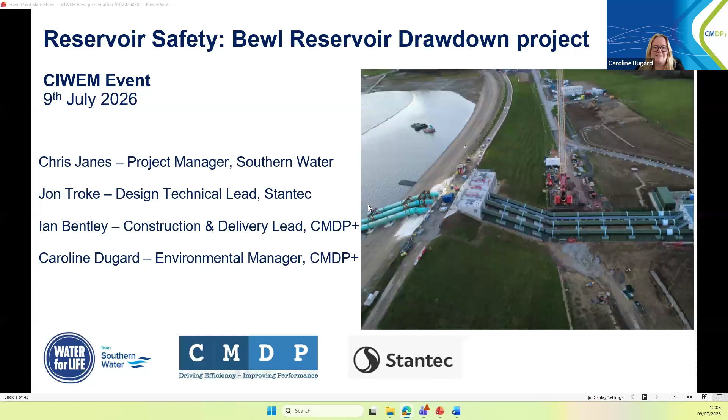Last but not least, Caroline. Hi, everyone. I'm Caroline Dugard. I'm the Framework Environmental Manager at CMDP, and I was involved in Bewl right from the beginning, all the way through construction, and now as it stands, we're just about to hand over. Brilliant. Thank you, Caroline.

So before we get into the exciting project details and technical engineering solutions, a little bit of context here. Bewl Reservoir was completed in 1976. We've just celebrated its 50th anniversary, and it's located on the Kent and East Sussex border near Lamberhurst. What makes this body of water so special is that it's the largest body of water in southeast England. And for those watching and enjoying the World Cup football, fun fact, it's got a surface area the same size as 436 Wembley football pitches. So it's humongous.

It's a key source of drinking water for East Sussex and Kent, supplementing the drinking water network for hundreds of thousands of customers within Southern Water and also Southeast Water customers. For example, the reservoir is the main feed for Burham Water Supply Works. In the summer, it supplements the low River Medway. And Burham supplies over 65,000 customers just in West Medway. So it's absolutely huge.

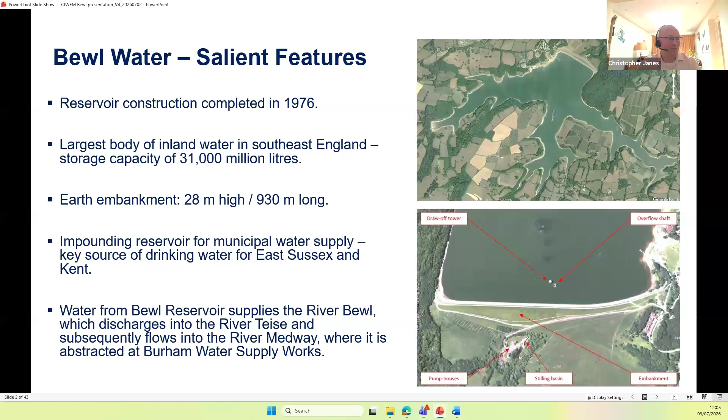So why is this reservoir project needed? Well, as I'm sure you can all appreciate, the greatest resilience risk for any impounding reservoir such as Bewl is structural failure.

Thankfully, a breach was avoided. However, the incident clearly demonstrated the potential severe consequences of a reservoir failure, including risk to life, widespread community disruption, and significant economic damage. Managing this low likelihood but high consequence risk is therefore a fundamental responsibility for reservoir owners and operators such as Southern Water.

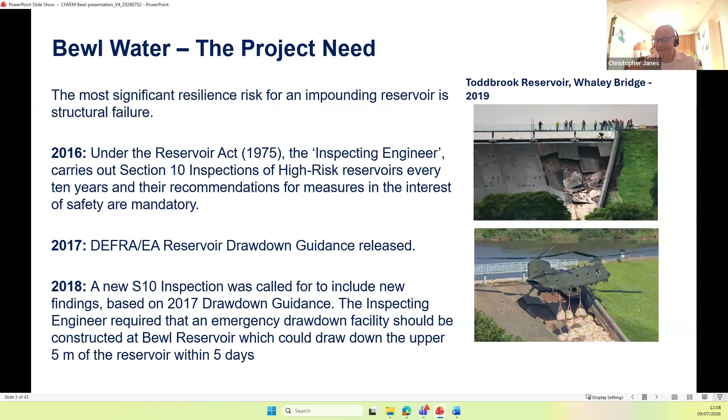This project is supported by piezometers and instrumentation within the earth embankment to monitor the internal dam conditions and detect changes affecting structural stability. So there's a bit of context for you all on what the project is and why it's been delivered.

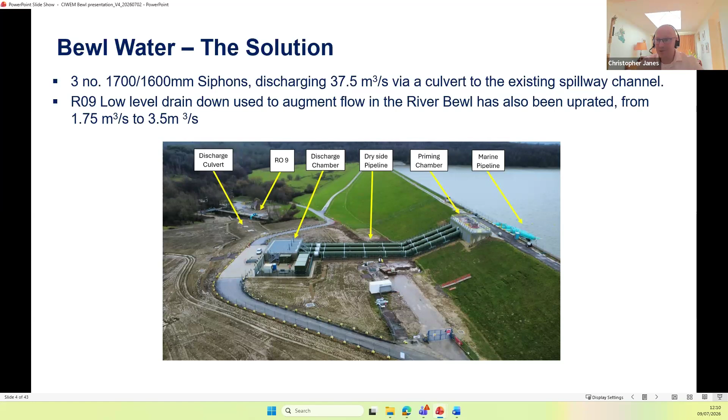Firstly, before we settled on siphons as the preferred solution, there was a staged options selection process. We did start with a long list of options, but very quickly it became apparent that many of those options simply didn't have the capacity to discharge the amount of water that Chris has just been explaining, those large volumes, or other options weren't acceptable in terms of construction constraints in respect to reservoir safety. For example, any options that involved tunneling through or under the dam were very quickly discounted. So our long list of options very quickly got whittled down to just 2.

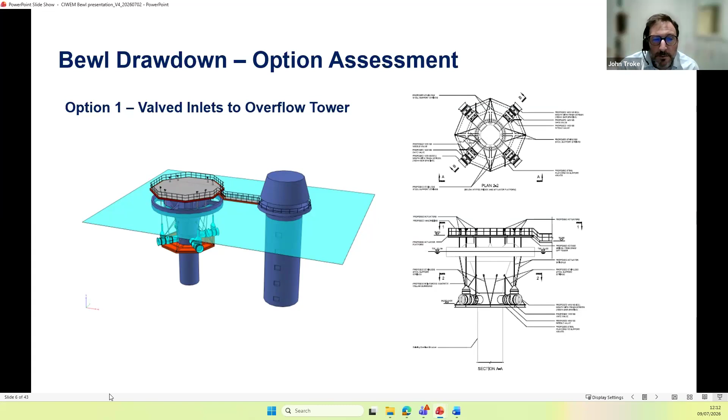So this was developed to a concept stage, but then eventually it was ruled out for reasons that I'll explain in more detail on a subsequent slide. But our other option was, of course, the siphons approach, which is shown on the next slide, Chris.

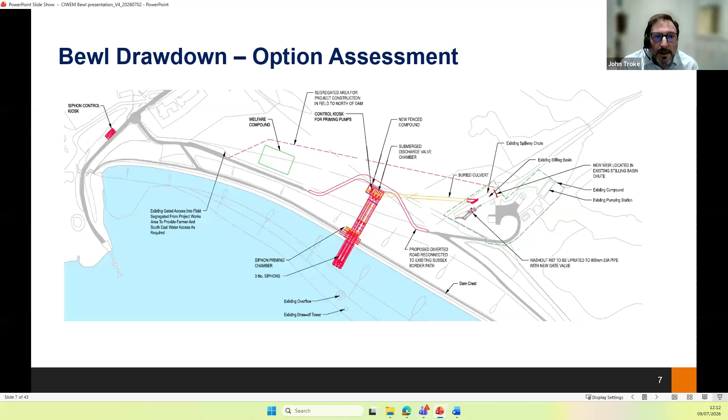So we did some stability assessments, and we found that putting 4 large diameter holes halfway up that shaft was not really acceptable from a structural stability point of view, particularly with the weight of all the valves and pipe work that would be installed along with operating platforms, which would make it more top heavy. So the analysis suggested that from a structural stability aspect it wasn't necessarily a feasible option.

But there was also a second reason to discount it. As mentioned, the openings would need to be about halfway up. We decided it wasn't feasible to demolish holes in a structure like that using underwater technology, so we believed there would be a need to temporarily drain the reservoir down to the level of those openings to do the construction. That would have been quite an undertaking.

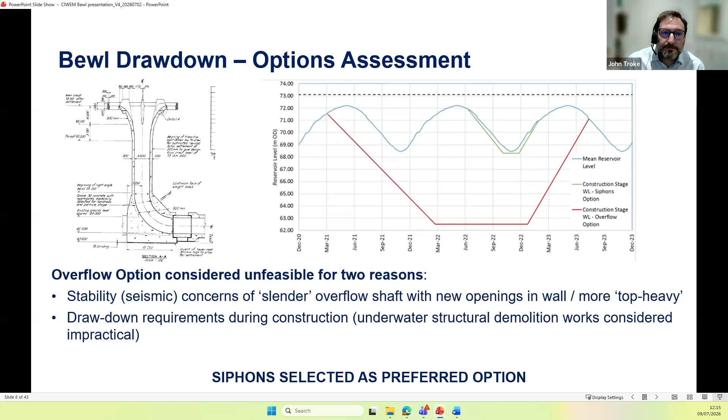For definition, going back to what Chris has already said, we had a requirement to achieve 5 meter drawdown from full supply level within 5 days, with a Q50 or mean or median catchment inflows to the reservoir. It was important that the siphons could be primed and operated over that full operating range.

There was a need for them to be primed down to a level of full supply level minus 5 meters, and it was also required that the siphons should be wet tested routinely in future—notionally, one siphon fully wet tested every 6 months. We consulted guidance from the CIRIA Siphons in Dams publication, and previous case studies, particularly Queen Mary Reservoir from Thames Water, which gave us a couple of key principles we chose to adopt.

We wanted a dual priming system—where you can fill the downstream section of the siphons simply by pumping water into the pipe until you fill the siphon up to crest level, then use vacuum priming to prime the crest section and the upstream leg of the siphon. Going for a vacuum priming approach means you don't need a submerged valve on the inlet to the upstream leg, which has significant advantages for us at Bewl.

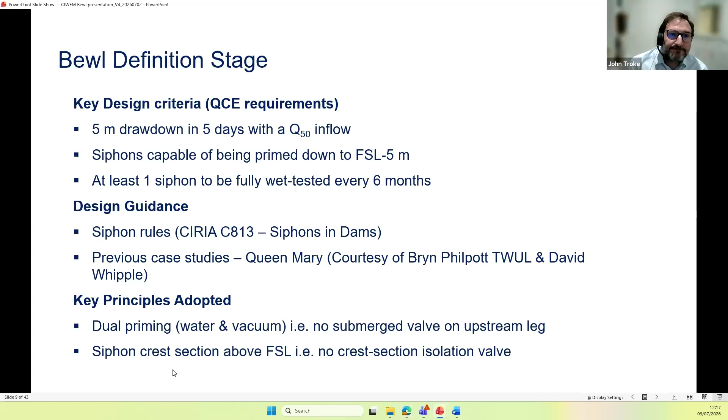So I'll go through the design starting at the upstream end, heading downstream.

The first consideration is the siphon inlet. We needed to set it sufficiently below water to keep it submerged, using standard equations for submergence. The idea is to have it sufficiently submerged to avoid vortexing when operating. If vortexing occurs, the inlet could gulp in air, and in a siphon system those chunks of air could break the siphon effect and stop the flow. So it's very important to avoid air entrainment through the inlet.

So we used our standard equations to pick a level, and then tested it using computational fluid dynamics, CFD, which are the colorful images at the bottom. They confirmed no vortexing and a fairly tranquil approach into the inlets.

But just to give some additional security, the drawing on the right, which is a section, shows the inlet bell mouth surrounded by an inlet cage. The top of that cage is a solid steel plate acting as a hood, which also helps prevent vortexing at the inlet. Okay, next slide.

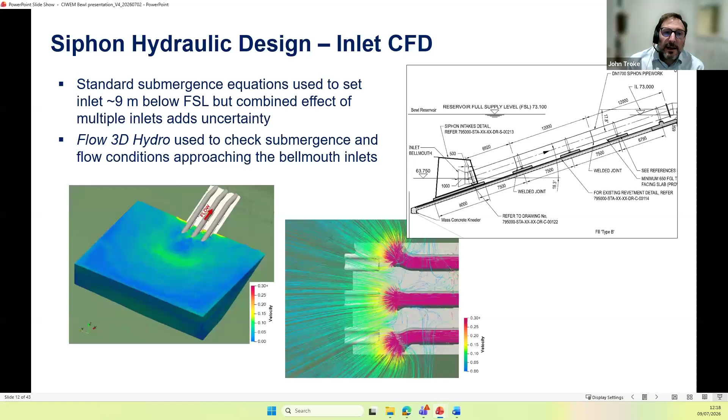The siphon pipeline structural design, we did by producing a stress model, shown by the upper image. Civil engineers used to designing below-ground pipe work will soon find that above-ground pipe work on a siphon scheme like this is a completely different beast, with a lot more to think about in many respects.

So we did this stress model, and we modeled a number of hydraulic scenarios to assess internal pressures in the siphon pipes. We also modeled external scenarios to give us external pressures on the pipe, things like wave slam on the wet side, the reservoir waves hitting against the pipe, but most significantly thermal effects in summer and winter, which were quite onerous.

The drawing at the bottom is a long section through the siphons with the inlet on the left. You'll see the upstream leg of the siphons sat on concrete pads placed onto the existing dam revetment, with steel saddles designed to slide to accommodate thermal movement.

Similarly, on the downstream slope of the dam, there are concrete pads with screw piles going down into the dam embankment, also fitted with sliding saddles to accommodate movement. At the bottom of that downstream slope, there's an expansion joint to take up movement before the horizontal section to the discharge chamber.

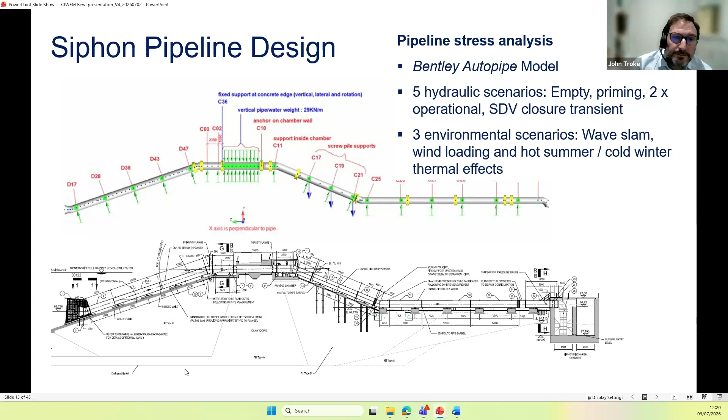Firstly, the priming chamber then. This is in the crest of the dam. We opted to provide a reinforced concrete chamber embedded into the downstream side of the crest of the dam. The idea was that all the machinery, moving parts, controls, everything would be housed in that concrete box, so it was an inherently safe structure. By doing that, there was no need to put up any unsightly security fencing on the crest of the dam, which wouldn't have been a good option.

So by doing that, we were effectively able to turn the roof of that priming chamber into a publicly accessible viewing platform. The bits of hand railing you see around some of the covers are actually demountable, so they wouldn't be there the majority of the time. It's a safe structure for the public to go on top of, without risk.

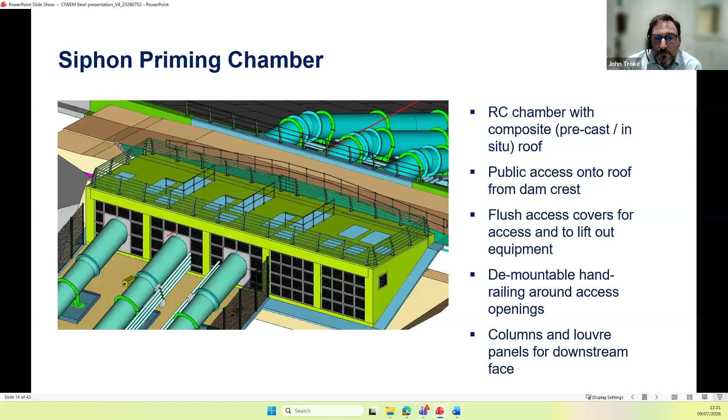That's the priming chamber from the outside. We'll now go to the next slide.

This is the priming chamber with the concrete box removed so you can see inside it. At the right side of that 3D image, you'll see four shapes with a person stood between two of them. That's the duty standby water priming pumps and the duty standby vacuum pumps. Going for the dual priming system has the benefit that while you're vacuum priming one siphon, you can already start water priming the next one, so they overlap. That meant we could prime all 3 siphons in well under 3 hours, so in an emergency situation you'd be confident of getting these siphons up and operating very quickly.

Also shown on the siphons, you'll see various pipe work and valves that are there to aid that priming process and to allow the siphons to be broken if needed, to stop the flows at the end of a test, or if you've achieved what you need. Okay.

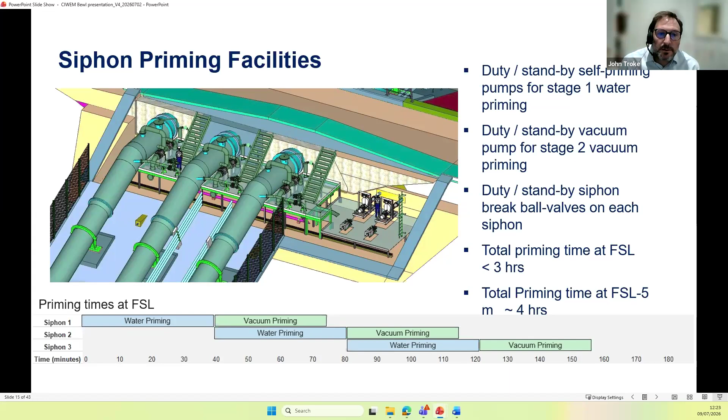At the downstream end of the siphon pipes, we've got the siphon discharge chamber. Here we opted to use Glenfield submerged discharge valves. The requirement to test the siphons meant we had to minimize the volume of water released by each siphon test, so we put hydraulic cylinder actuation on these valves so they could be opened and closed within 70 seconds, which is remarkably quick. If you've ever watched an electric actuated valve open and close, it can be tiresome, but these are much quicker.

The design adopts a standard Glenfield valve civil arrangement. Each valve is housed in its own stilling basin with internal baffles for energy dissipation, and the water weirs out from each stilling basin into a common collection channel, from where it gets conveyed by the culvert. It's worth noting that when we opted for the quick acting valves, we also did a surge analysis to make sure that action didn't create unacceptable pressures in the siphon pipes upstream.

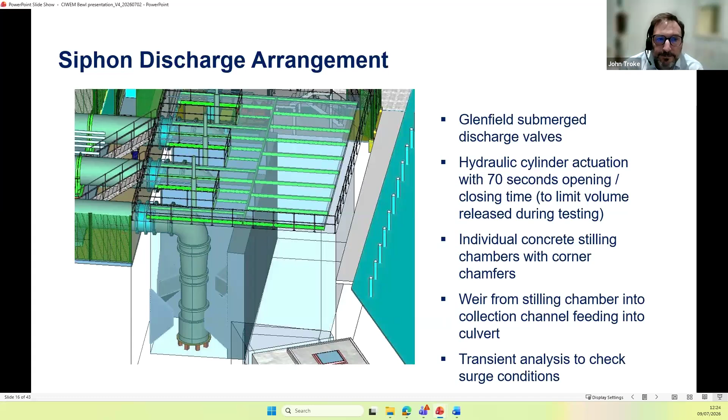From the discharge chamber, the water is conveyed by the culvert. It's a very large culvert, 4 meters wide, 2.5 meters high or deep. Because of the topography of the valley sides that the dam's situated in, it was laid on quite a steep gradient, so it's 140 meters long, sat on a 1 in 10 gradient. That creates the potential for high velocities.

There's some standard guidance and software available from America that we used for initial checks. We used software called HY8, and that told us that for this particular arrangement, we should be looking at internal dissipators spaced every 2.5 meters. Those were in the form of 250 millimeter high weirs, effectively, to send the water cascading down. At the downstream end, we simply flatten the culvert out and create what's called a USBR Type 1 stilling basin, the simplest form of stilling basin. That basically ensured the water exited the culvert and joined the existing spillway chute in tranquil conditions with velocities in an acceptable range.

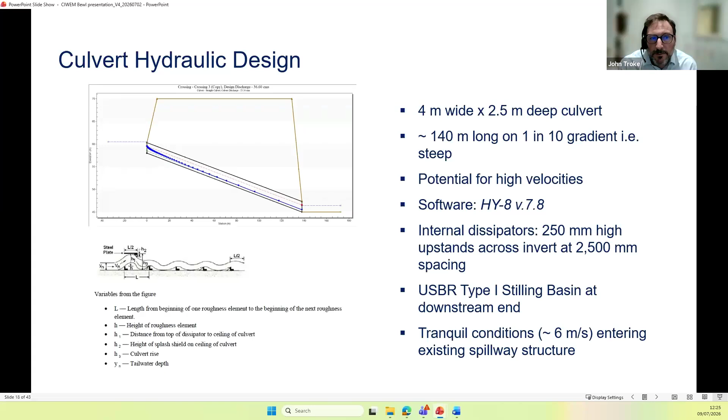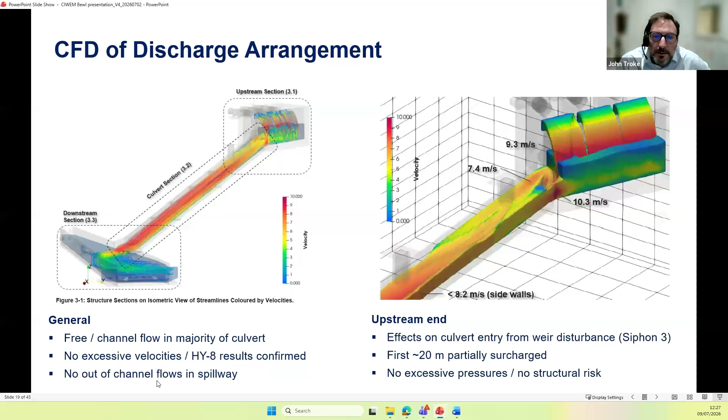So that means the water coming down the culvert from the siphons gets collected behind that weir, and there are a number of openings so that the water can be released to the tiny watercourse downstream very gradually.

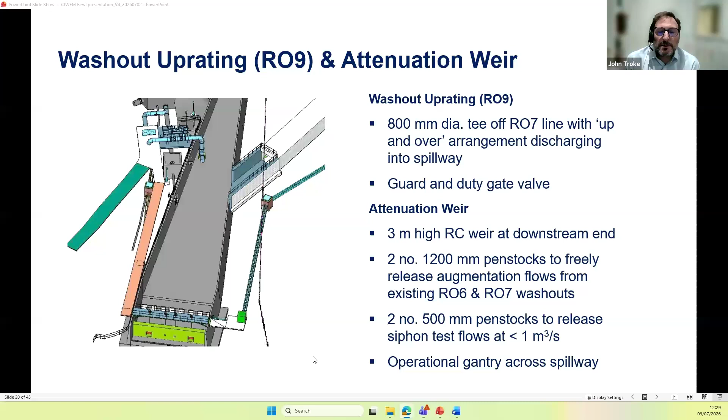There was also an operating platform, the blue structure just above the lime green. In the back of the picture on the left you'll see blue pipe work - this is where we uprated a bottom outlet washout arrangement, so we could improve the drawdown characteristics below the operating range of the siphons, getting the lower portion of the reservoir volume out quicker than in the current situation.

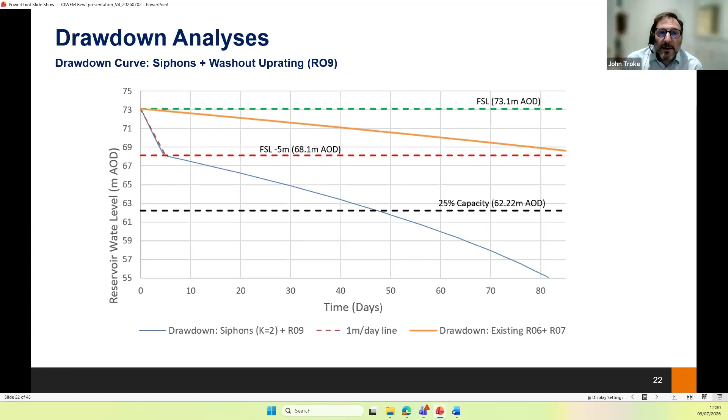And that's my part complete, I think, Chris. Fantastic, thanks for that, John.

So I've got the challenge of trying to talk about the construction of this project within 10 minutes. I'll do my best and do a whistle-stop tour through the construction of Bewl.

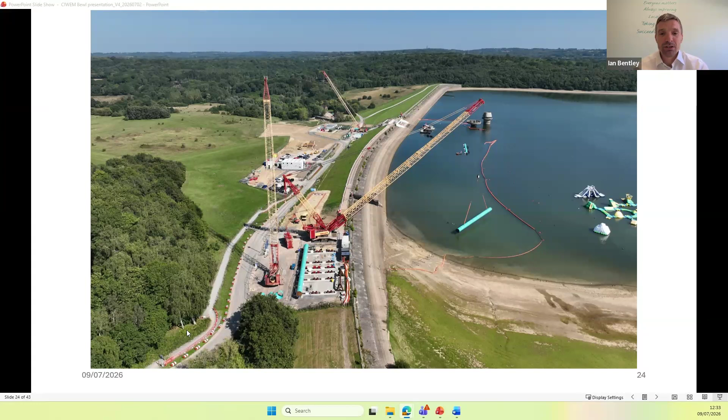So the pipes for the marine side were fabricated together on site, and then the ends capped off so that when we lowered them into the reservoir, they floated. We then floated them and moved them along to where they needed to be on the dam crest.

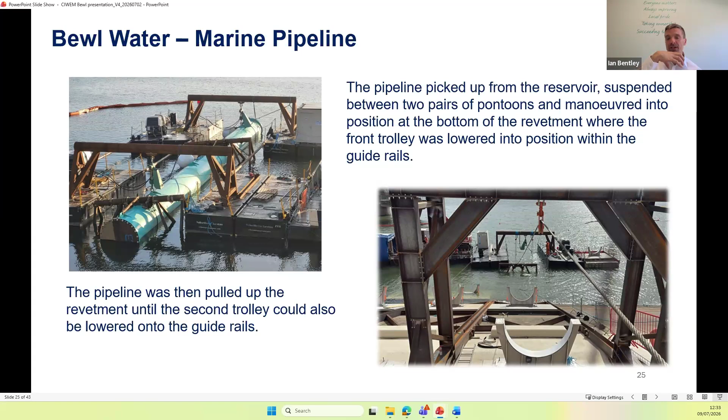We used some steels going down the revetment as guide rails. Those trolleys had wheels on them, they sat into those guide rails, and from that position we could then winch them up into place.

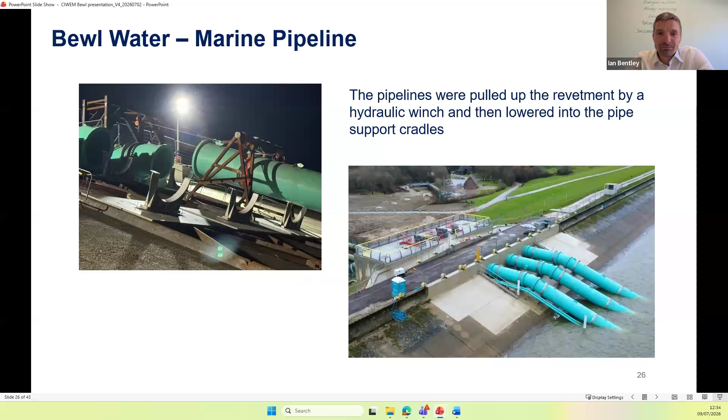You'll see the alignment issues we were dealing with. Again, these were fixed pipes - the pipes going into the dam crest were cast into concrete, so we had to get the gaskets and the mating faces absolutely perfect.

Due to the pipes needing to hold a vacuum, 0.9 bar G, we needed a very specialized gasket to deal with those pressures, as well as meet the design life, because these joints are not easily accessible - you'll see the works we had to do just to get them into position. That meant we had to go for a specialist material.

With those materials, we didn't have as much give as you'd usually have with, for example, an EPDM rubber gasket. We've only got about 0.8 millimeters, which on these 1.7 meter diameter pipes, I've been reliably informed by calculations, is 23 thousandths of a degree. So trying to get the alignment of these pipes coming up the reservoir and moving them in the saddles was definitely a challenge, but one that we overcame.

We put flanges on loose on those bends and then welded them, then sent them off to be finished fabricated to ensure we could get that alignment.

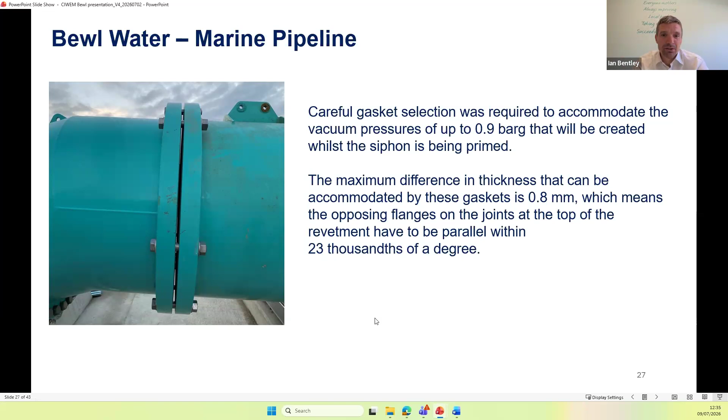One of the challenges, as John mentioned, was the previous profiles of where the water levels had been in the reservoir. We were carefully monitoring this and had to phase our works around where the water levels would naturally be. The reservoir is a great resource - as Chris said, it provides water for many, many homes.

The majority of the water in the reservoir has been pumped in - there's not a huge amount from catchment runoff. There's been an investment in paying to pump it into the reservoir, and for water security we obviously want to keep as much water in there as possible, for not just this summer but the coming summers afterwards.

So we had to time our works to deal with the predicted water levels. In typical fashion, the summers we were working over were some of the driest on record, and some of the driest in the last 10 years. We were monitoring water levels 3 times a week, plotting where that was projected to go based on previous years' data, and planning our works accordingly.

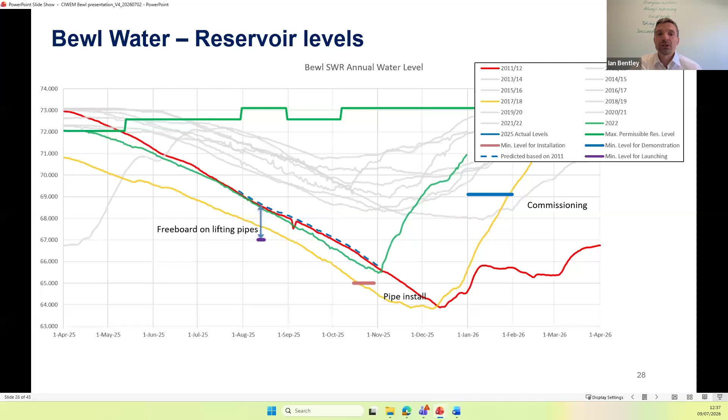The final one was also having enough water for commissioning. As the water levels drop down, we then also need them to increase enough so that we had the required water level there. The next slide shows another one of the challenges we had with water levels.

This was when we came to doing the landside works, excavating the dam crest. As John said, we went for a siphon system that meant these pipes could be quite high in the dam, but we still had to excavate through the clay core. That meant we had to time this carefully with when the water level was naturally low, but then complete the works in sufficient time so that Southern Water could pump into the reservoir and restore those water levels ahead of the oncoming summer.

That meant we were quite time pressed for this, so we had to do some very careful planning and also careful protection works of the dam. This is when we're excavating into its clay core, so it's when it's at its most vulnerable. We wouldn't want that clay core deteriorating and potentially leading to catastrophic consequences. So we had to do careful monitoring of that, doing hand shear vane tests, and also protecting the core, keeping it exposed for the minimum amount of time possible and putting temporary covers on it as well.

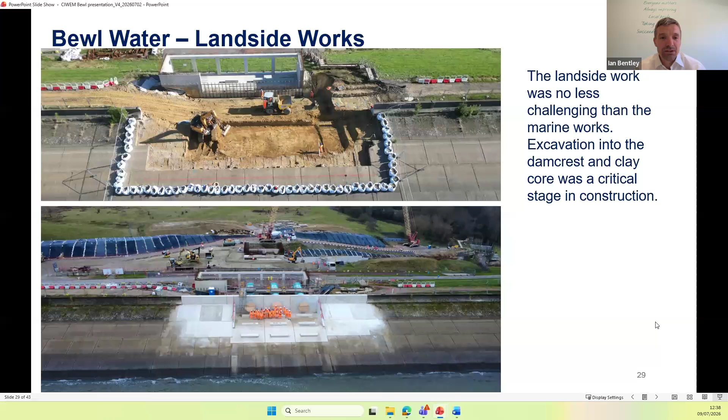This is the discharge chamber. An aerial view gives a sense of the scale of it. If you went to Bewl now, you'll see in a photo later there's only 3 meters of this structure visible above ground, but the actual structure and excavation itself was 10 meters deep. The base slab itself is 1.8 meters thick with meter thick walls. So it's a substantial concrete structure with some complex structures in there as well. As John mentioned, the chamfered corners inside the individual cells were particularly challenging to construct.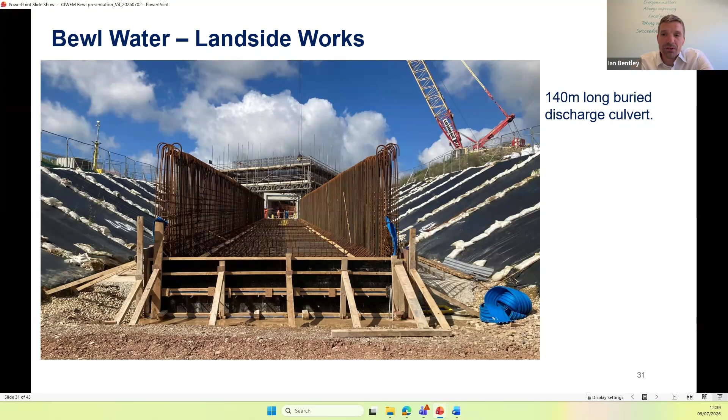Now this culvert's got up to 5 meters of soil reinstated on top of it, so some significant landscaping works we had to do. The next slide shows the inside of that culvert and those energy dissipators that John referred to.

Casting those in, the structure is a composite precast and in situ concrete structure. The roof panels you can see at the top were precast panels that we placed on top, and then had an in situ concrete topping slab and in situ concrete walls and base. The water you can see coming through there is because we had the hatch open. I assure you it's not a leaky structure.

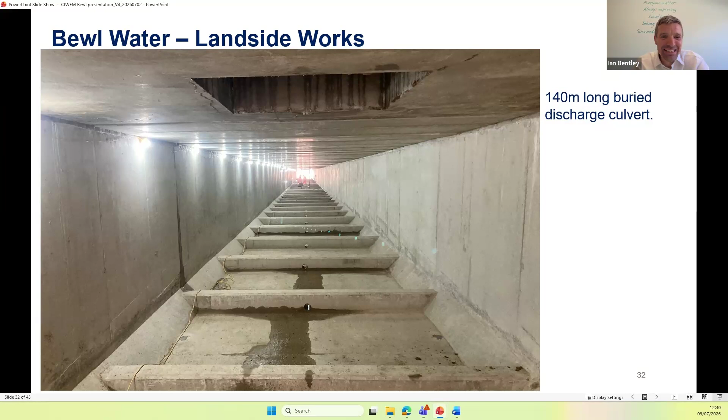Go on to the next slide, Chris. Yes, we had some challenging lifting operations. I mentioned earlier the 500-ton crane lifting the pipes out into the reservoir, but lifting these discharge valves into the discharge chamber was also quite a challenge. They're 9 meters high each, 21-ton valves, and had to be treated carefully.

We got them on the wagon from Scotland, had to stand them upright and then carefully lift them into the chamber, which didn't have much room around it when you consider the chamfered corners in there, and also access scaffold required to get to the bottom of the chamber to connect the holding down bolts when we place these into position.

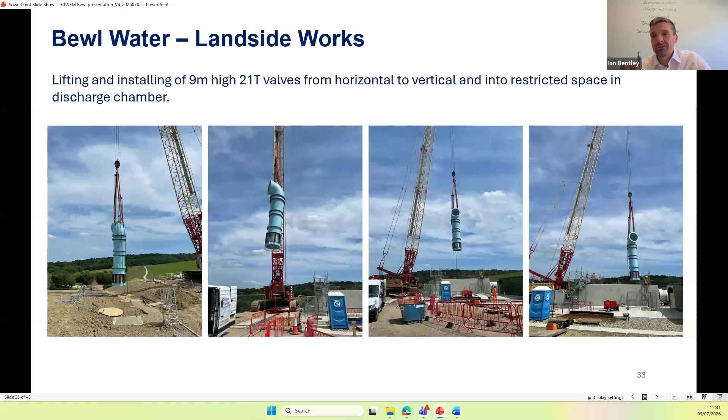So some careful lift planning, and we used 4D visualizations on this to plan the lifts and also to run the lifting team through. So on the next slide is a good example of that. Hopefully the video will start playing.

This was one part of the works. We had to thread these pipes into the priming chamber. So in the very sped up video, we had to lift the pipes through and then re-sling them while they were suspended, so that we could pass them through underneath the concrete beams there.

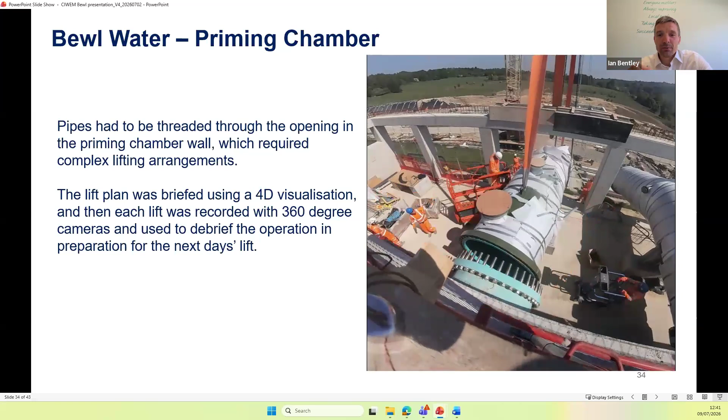The team did a really good job of this, but we spent a lot of time doing a load of planning on this. So we did 4D visualizations again to model how we would lift the units, where people would be positioned, consider all the health and safety impacts, as well as the slinging arrangements and how we would access each part.

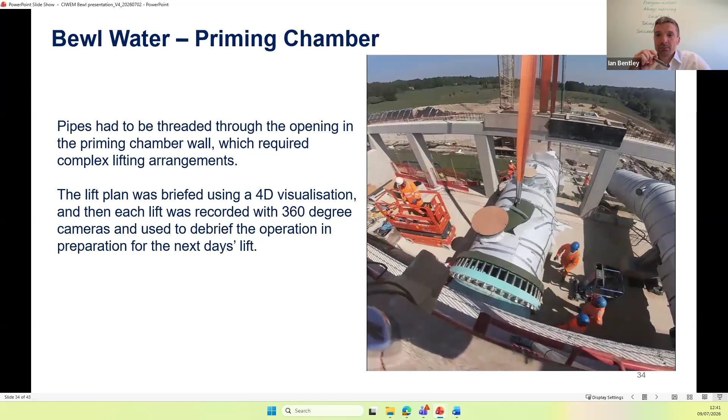We then used this to brief the lifting team. So we showed them this a few weeks out, got their input on it, made sure they were fully aligned with the method that we were going for. And then we used it again as a daily briefing for them before we started the operation.

We then used the footage you're seeing now, recorded for the purposes of reviewing with the lifting team. So as part of a continuous improvement cycle, after each lift, we stopped with the team, got them back in, reviewed the footage together, compared that versus the 4D of how we were planning on doing it, and discussed any optimizations, any things that didn't go according to plan, so that each one we progressively improved on.

The one you've seen was the last one, and it was the windiest day. We were getting close to the limit on the crane for the wind there, but the guys did a really smooth job of installing that, and it showed that the system we were using was really good and managed to make that a smooth operation.

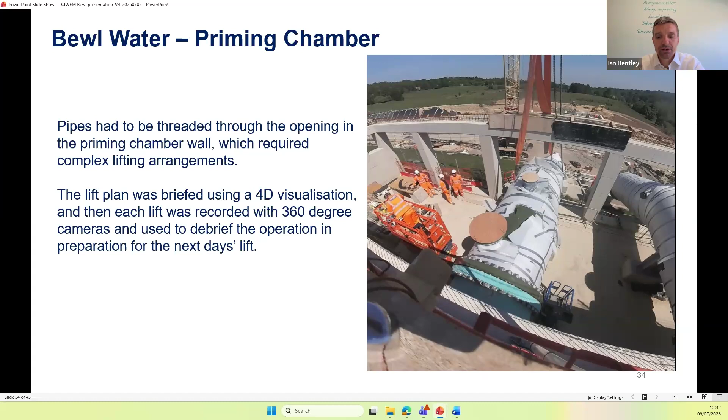As John mentioned, we also had some pipe work to do down the bottom of site. This was upgrading the outlets, RO9, the reservoir outlet 9. By comparison, this was relatively small and easy pipe work after you've been dealing with 1.7 meter diameter. The 800 stuff down the bottom was a lot smaller, but challenging nonetheless, dealing with the existing assets, excavations next to existing assets, and connecting into them and old pipes.

And I'm sure people in construction will know the challenges that can come with that. But you can see on the right-hand side there the picture of when we tested that, to show that we've done the connection and successfully got the flows out that we required.

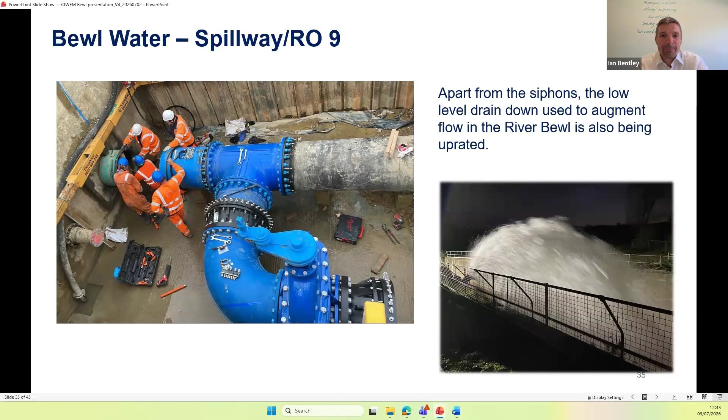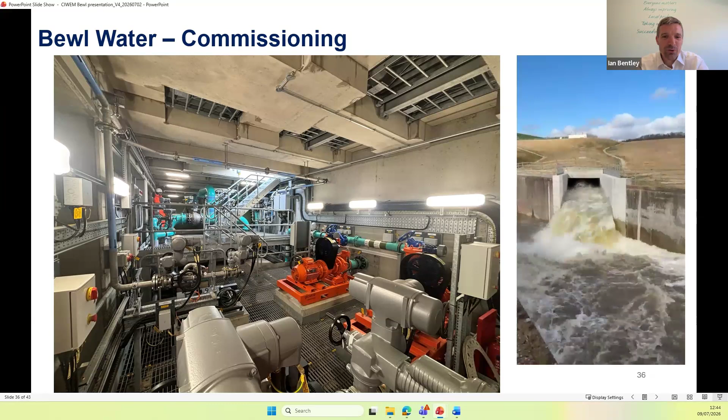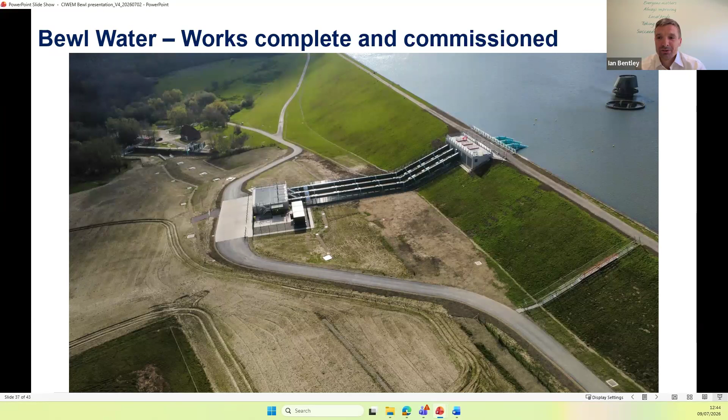And that's the final works. So the grass seed's starting to take, all of our work's completed on site. And as Chris said, we just commissioned earlier this year and got our sign off that we'd met all of the requirements of the Section 10. The QC signed that off and sent that to the EA earlier on. So I'll hand over to Caroline to talk about the environmental impacts.

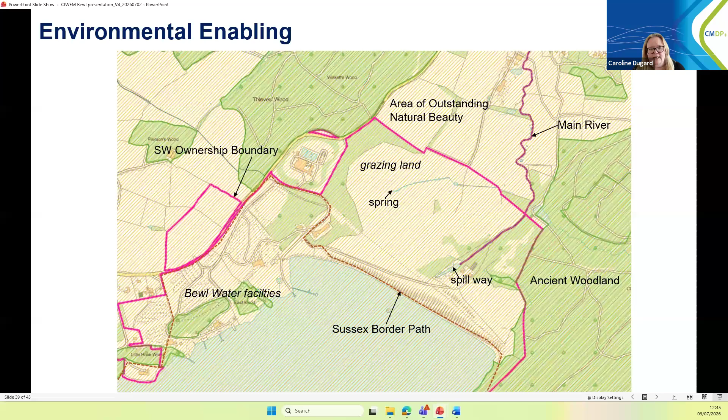So in the enabling phase, of course, we're located in that High Weald National Landscape, so the designation often referred to as the Area of Outstanding Natural Beauty. We weren't subject to any planning permission for the works, but we were subject to EIA screening. The land was viewed as Southern Water operational land, and only certain elements of the works were subject to planning, so the project as a whole was EIA screened to see if it would need a full EIA for the assessment of impact onto the environment.

During that EIA screening, we went through a lot of different aspects of the environment. First of all, the visual aspect, of course, we're changing quite a large area of just greenery next to that dam wall into operational infrastructure. So in that option selection, which they talked about with the engineering selections, we were also looking at reducing that impact and going for those below-ground pipeline areas where practical and possible, and then using the existing assets as well.

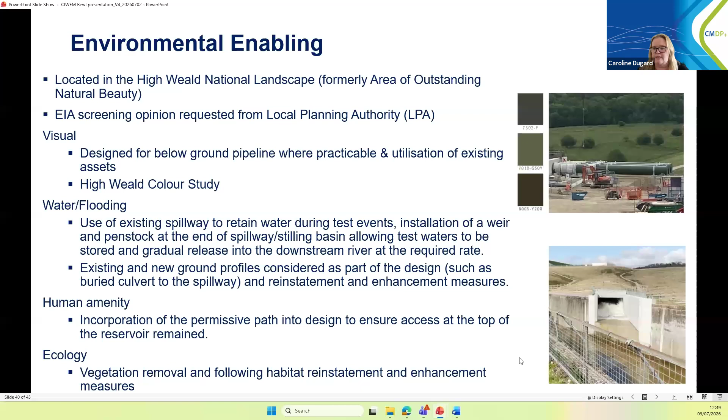So whilst we were in delivery, that EIA screening opinion - everything that we put into that, the designs, all of the commitments that we made - were our rules on site to stick to.

We also had quite a lot of water management challenges. You've seen in quite a few of the images already how much of a hillside we were working in and what the actual topography and environment was. We've got Weald Clay there, and we've got an awful lot of runoff that comes from any rain event.

And then on the wet side, so the marine side, I guess, we had zebra mussels to contend with.

They're present in the environment there, so lots of controls to make sure that we're not spreading those off-site with any equipment, boats, etc., that we've got as part of our construction methods. And we had a silt curtain in place for the works as well, preventing anything in our working wet envelope from entering further into the reservoir.

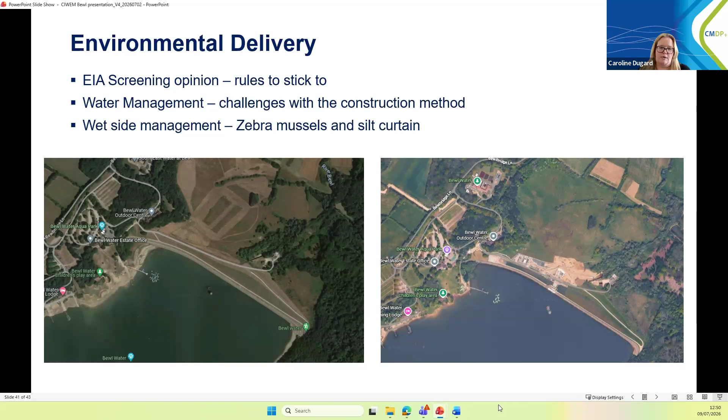If I could have the next slide, please, Chris. So we had a lot of stakeholder interactions, not only for the path, but for the whole job. We wanted to make sure that whilst people couldn't object to planning permission, people could very much see us when we were on site, and we were very much under the microscope. So we had an extensive stakeholder interaction program.

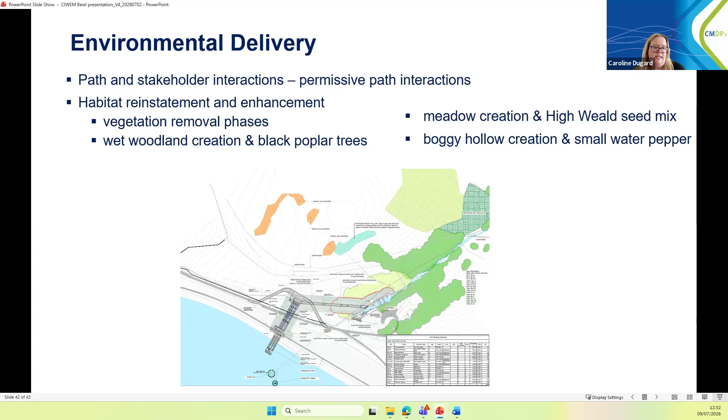So we've done a wet woodland creation with some black poplar trees - we've got a picture of those in a moment. There we go, there they are. These are really rare trees in Kent and East Sussex - there's only around 20 adults of them in the whole region. We were given, by the Black Poplar Trust, part of the High Weald Association, 20 in the first year and another 20 in the second year, and the vast majority of those have survived in that area. So it's really good news, and hopefully they will go on to mature to adulthood.

And then we've also done some meadow creation. So where we've taken the grassland away, we've taken High Weald seed mix that's been specially collected within the area and sown those seeds as well. The other picture on screen is us planting around those black poplars - it's been enhanced with around 2,400 other wet woodland species trees. So all the holes are being prepped for it, and it looks really, really good at the moment.

We also diverted part of the spring. We knew that the spring used to trickle down to this area, and we reinstated that route - it had been blocked up for sheep grazing, etc. But we put that back in place, and we've actually created much more of a wet woodland than it would have been before. So it's working really, really well, and it's looking really good, and even in the drought at the moment, it looks really wet. So that's really good news.

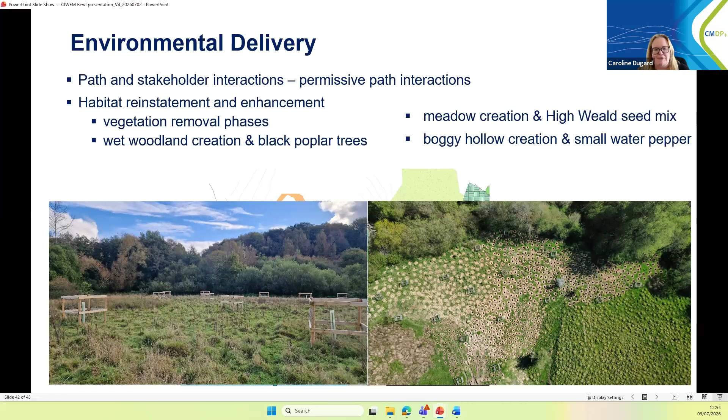And then the last thing to talk about is the boggy hollow creation. So boggy hollows are these dips in the clay - they hold the water a little bit more on the hillside. They create a different landscape, a little ecosystem that attracts different plants and insects and supports a different kind of biodiversity. Our botanist found small water pepper, which has no records in the southeast in this kind of area in the last 25 years or so. So that small water pepper is thriving in these little boggy hollows, and so we have created more boggy hollows for that to have more chance of reproduction and to enhance that habitat as well. So it's been a very exciting project, both engineering-wise and environmentally.